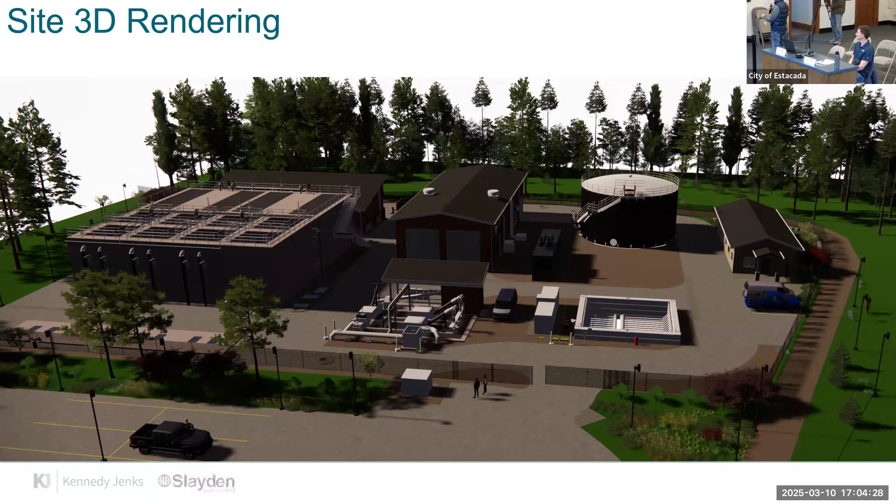This structure here is for odor control. It will be filled with a wood chip and sand media. All the air is drawn off of the solids building and the headworks where we are storing the dumpster. There's a small building here with a roll-up door, so that's treating the odors from that. And then a new prefabricated admin building on the right here. So those are the improvements in a nutshell. I like it. Very clean design. Thanks. So there are some considerations when it comes to landscaping.

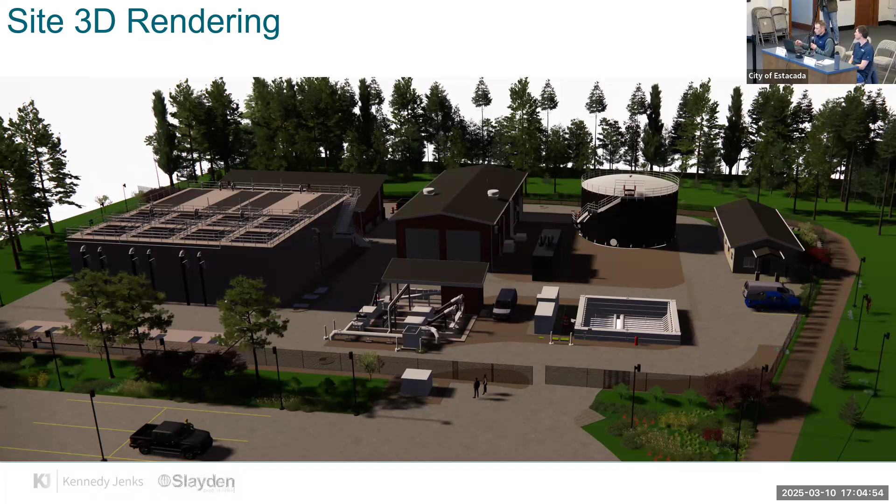You can go to the next slide. So we'd like to give you kind of an update on where we're at in terms of design, some of the project milestones that are coming up. And then I'll show you these options that we've got for on-site storage to kind of increase the amount of parking that's available within the footprint of the plant site and what impact that has on the landscaping. And then Eric's going to talk a little bit about the open house that we had here and the bidder outreach that we did. Then we'll highlight maybe some areas of concern on pricing if we get that far. So next slide.

So... okay, so, sorry, didn't mean to yell at you.

So we wanted to walk through kind of the timeline of what you can expect moving forward. So looking back at October is when we executed the early work amendment 1 for the long lead equipment. That was to buy the pieces of equipment that had a long enough lead time that we had to buy them before we started construction. So that was your main MBR treatment equipment technology, the electrical service gear, and the generator, because all those had multi-year lead times. So that work is under contract and we're progressing into submittals.

So that's going well. Like Sean said, the 90% design was completed in January, and that has been submitted to DEQ for review and approval. So that's currently where we sit. DEQ has approved all of our bid packages and all the procurement documents, but we are waiting on them to review the technical documents. They have 2 different people at DEQ that review the documents. One is to make sure we're meeting all the obligations for procurement, and the other side is the guy who actually reviews the KJ design for the technical: is this going to do what it says it's going to do?

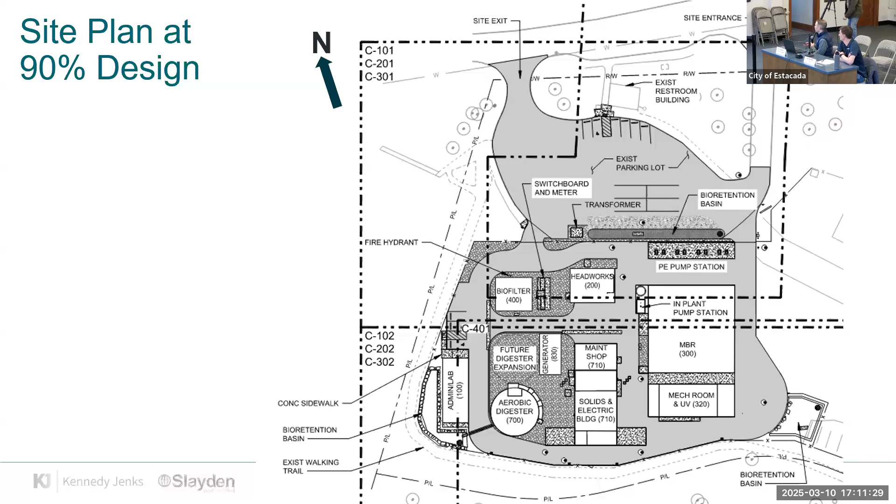Chris Lewis had requested some additional storage on site, and we were brainstorming ideas to get him that. If you go to the next slide, the current landscape design is on the left here. There's the landscaped area I was talking about. With the checkers is the bioswale. Additional planting over here on the left.

There are some tall trees in there that we try to represent in the model, and some shorter trees and bushes that provide some concealment for the tank once they mature, but they won't be mature right out of the gate. So you are going to see the tank from the parking lot. Chris's idea was to put some more gravel in here so that he could park additional equipment and have some on-site storage for laydown for spare equipment.

But that would push the swale to the north, and then we're starting to create a choke point here for turning of large vehicles. One option would be to keep the landscaping in play. It would take up more of the RV spots, the longer spots that are out in that parking lot. Another option would be to put landscaping along the road.

That's a little more robust than what we'd planned. We were just going to put 1 or 2 ponderosa pines back here, and we could choose any tree species, but that's what our landscaper is showing at this point, these two here. So those are the options. And then what it looks like from the ground would be on the next slide.

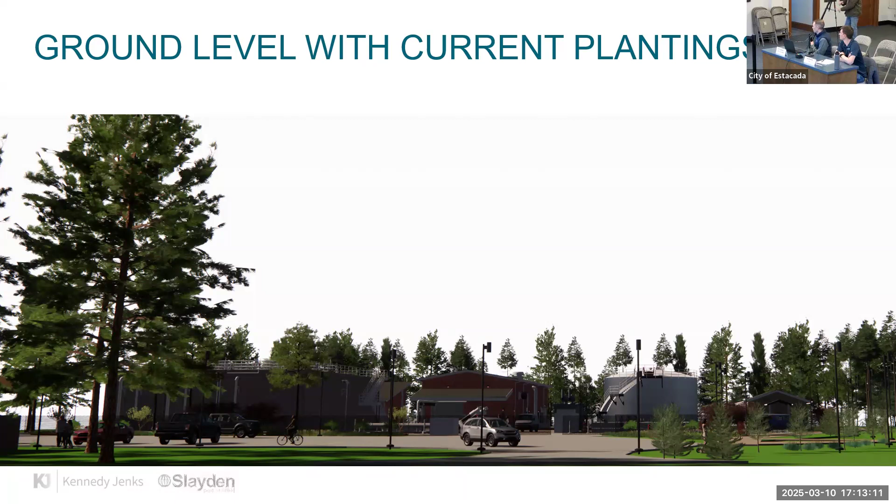As accurate as the model would be, it's kind of hard to see, but here's the taller trees in front of the tank, and some of the shorter trees and bushes out in front. If you were much taller, or standing on a ladder, it would look like the next slide, just to give it some perspective, so you can see the landscaping a little better. These represent a ponderosa pine relative to the tank at maturity, maybe the 10 or 15 year mark. So it doesn't completely hide the tank, obviously.

So if we did the additional storage, do we feel that we need to add more landscaping along the road? Or should we just leave it the way it is and Chris can park stuff across the street? That's sort of the decision point here.

How long would it take for the smaller plants to fill out? The smaller ones, I don't know if those are trees or bushes, the 3 little ones in between the big ones? I would say less than 5 years on the bushes, probably 2 or 3. And then these container plants, would they be a wall at that point? The bushes, would they be continuous or would there still be gaps?

There'd still be gaps. This is pretty accurate per the planting plan. I can't zoom in on this picture, obviously, but there is still space in between, and he's planned room for them to continue to grow and fill in. Are those going to go in at the very end of the project?

Or are they going to go at the beginning so they can begin to mature at the end of the project? Okay. Yeah, the pump station's right behind it. So we have to kind of get the concrete in and get everything backfilled.

John? Yeah, have you done any cost comparisons to see what ordering maybe a more mature tree would cost? I know you could purchase stuff that's further along, right? Have we done any side-by-side comparisons? What's that increase? I mean, when I look at that, I like where you're trying to go with this, but 15 years is a long time for a community to wait to cover up something that they don't want to look at in the beginning.

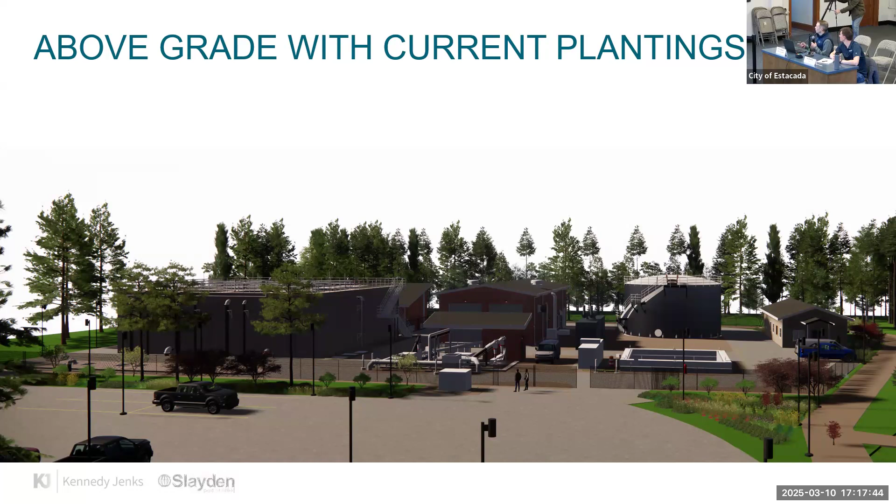My question, just for clarity, you were saying something about him having to park across the way. How would that affect this plan? Well, if you go back a slide, one more. We could choose to come out this far with the landscaping. And if we didn't do the gravel, we could leave the swale where it is here. So if we left the swale in this location, we could come out wider with the landscaping and provide more concealment. Right, and then Chris would lose this gravel area inside the fence, but then you'd need the existing treatment plant in some fashion where you could store stuff. Granted, it may or may not be secured if you choose to convert it to a park.

How much parking space, do we have square footage on that? What was the intent? Is that like semi truck and trailer? Yeah, you could park a couple of vehicles here, probably 3 or 4. It's 140 feet long and 14 feet wide.

I do think storage is important, right? I don't want to negate all of that, but the community's been pretty clear, as far as I've been a part of the process anyway, that we really don't want to see it. That was the biggest complaint, is that it's ugly. Is it going to be concealment? Is smell always going to be an issue, stink?

Yeah. So, I mean, is there an alternative option here where we could do both, kind of maybe the more mature trees and like half of the gravel or something? Is there? Yeah, that's kind of why we were thinking if we could increase the landscaping on the other side of the current restrooms. So you're gonna see less from the highway, you'll see less coming into it, but once you get in the parking lot, you'll see more because the gravel will have taken up some of that landscaping space. So really, it's just impacting once you get in the parking lot there.

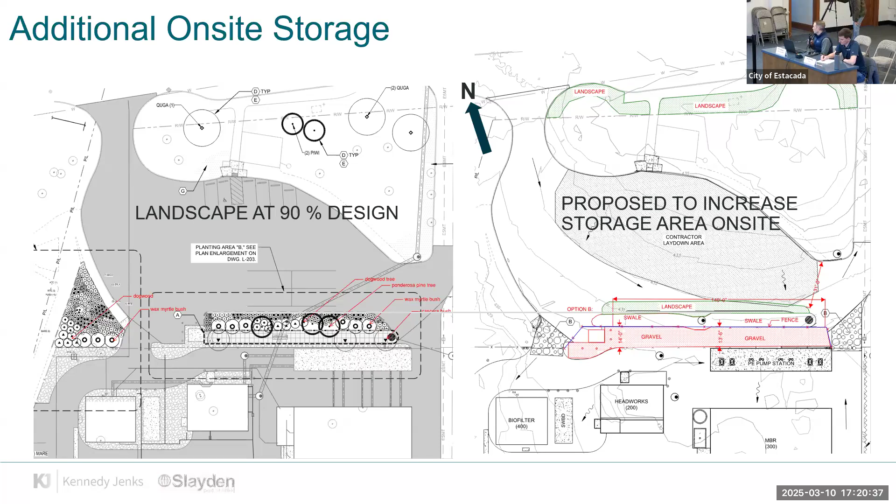That was really all we had to bring forward. If you skip ahead maybe 3 slides, Eric will talk a little bit about the bidder outreach that we did. Yeah, so since we met last time, we worked with Counselor McElroy to identify local contractors in this area that might be interested in the project that aren't in our normal type of industrial vendors that do treatment plants all day, every day. So we identified 29 local firms that we did outreach to, called, emailed, talked to them about what they might be interested in on the job.

And then out of that, we also held a public outreach meeting here, actually in this room, on the 19th, in which we invited everybody we talked to. And then the city also posted flyers, I'm sure a lot of you saw. So we had that meeting here in these chambers. We had 8 firms that showed up to talk to us. I was hoping for a little more, but 8 was pretty good. They came, they talked to us. We had sets of prints that aren't publicly available yet, so we were able to talk to them about what type of scopes they'd be interested in, point to a few drawings with them, and gauge their interest in the project and what we can do to get them interested in bidding.

So from now, everybody has to wait until the plans are publicly available. We've got the list of everybody we've talked to, both in the outreach, virtually, and that came to the meeting. They'll get copies of the plans when they're published, and then they'll have the opportunity to bid on the project, same as everybody else. It'll be advertised in the DJC, kind of the industry publication. It can be posted on the city's website, so that anybody in the market that's interested can download and review the prints. And at that time, we'll walk through the job with anybody who's interested. If they have questions, we've got like 10 people working on the job to answer questions and make sure that anybody who wants to bid on the job can bid on the job.

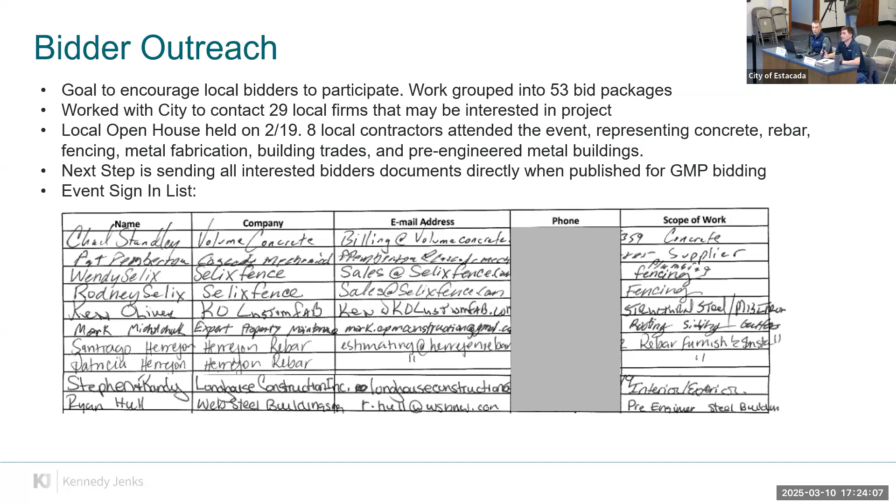I think that's really nice. What you put out here, it's a clean project. It's good to see. The plantings and everything, I'm sure we'll get more into detail on that front end, but I do think concealment at the beginning is a smart idea. So it makes sense to start earlier than the actual finished product, to get those things in the ground and established. So I'm happy with what we've seen tonight. Has everybody got any questions or comments? One quick question.

Go ahead, Mike. How soon will we know the updated cost estimate? So once we put it out to bid, that 4-week bid period, and then we'll have 2 weeks to evaluate bids, at which point we can share preliminary results. Okay, good. Well, we appreciate you coming out tonight. You did a great job. I think you answered our immediate questions. And I'm looking forward to going forward on this. It looks like everything's in play, so we'll wait to see what you come up with. Thanks for having us.

And I would just add that we're tentatively, like Eric had said, thinking of June 9th to come back with the full package to say, this is the GMP, guaranteed maximum price. If these people are going to be bidding this job, they might not do work for a year, because we're looking at a 2-year project, so it's hard to know how it's coming back. Still thinking positively that we're going to get some good bids, but we might have some things to work on, and so we could present it to you.